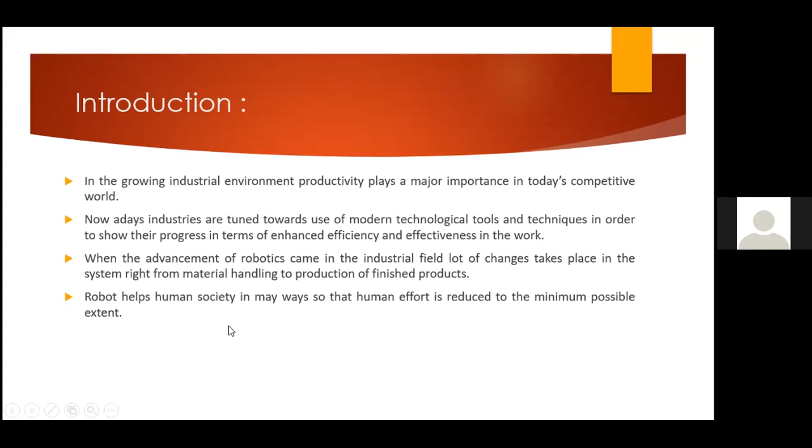So to overcome human accidents in hazardous, unstructured work environments, robots help human society by reducing the manual fatigue experienced by workers due to continuous monotonous jobs done by human operators. Automation brings safety to the existing work environment and keeps people more secure within it.

Today we are going to discuss some practical constraints in robot kinematics motion with the help of a small work cell unit, using the simulation package namely RoboDK solver. It is a process simulator, a three-dimensional process simulator. In that, we are going to discuss different hand motions with reference to a Cartesian coordinate system.

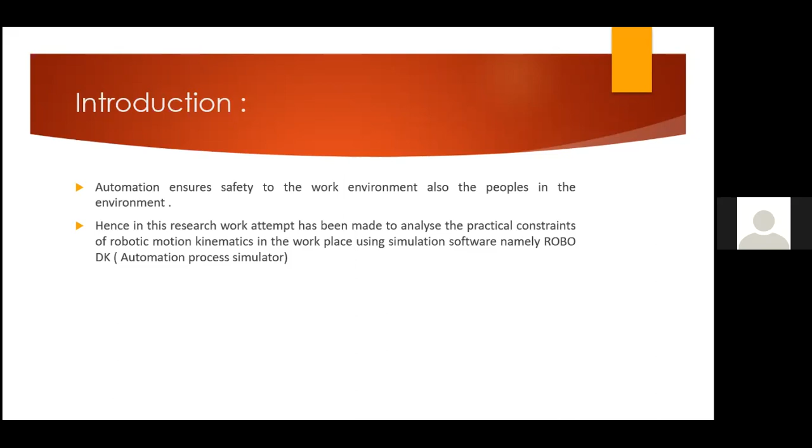And these are some of the literature survey, in which different authors have contributed their ideology towards robot simulation in different applications. Let us take the first paper, literature article number 1.

In this paper, the author has identified the use of robo simulators in areas like teaching, education, learning, and research, and also in training employees, that is software users. The use of simulators has become a good complementary tool to students.

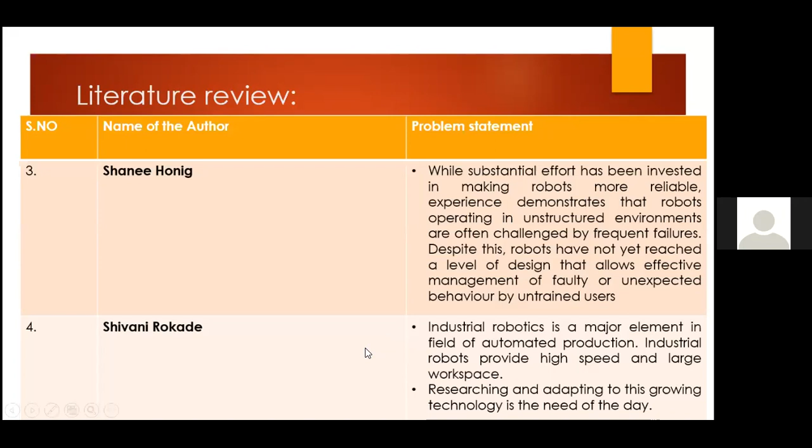And the last one, the fourth article. The author has focused on the advancement of industrial robotics, considered the need of the hour, which has to be implemented in research by doing a lot of survey-based work, understanding the social concerns of various industries, so that we can fulfill supply and demand, and what the customers exactly perceive based on the product delivered by different manufacturing industries.

So from the literature survey, it is observed that based on a couple of papers, researchers have contributed general ideas by using simulation in the area of education, conducting job interviews, and factory line assembly works. But only a few works, at a minute micro level, have focused on kinematic motion analysis.

So why the reason for focusing on kinematic motion analysis? Before going to mount any robotic assembly setup inside the work cell layout, we need to ensure the affordability as well as the flexibility of the robot, such that it can freely move its joint arm linkages without colliding or hitting nearby objects.

So the work can be completed with very high accuracy, and the quality of finish in job completion can be expected at zero defect at a very high rate. For that purpose, the collision mapping planner, which involves the various kinematic motion of a robot link, that we are going to discuss in the future consecutive slides.

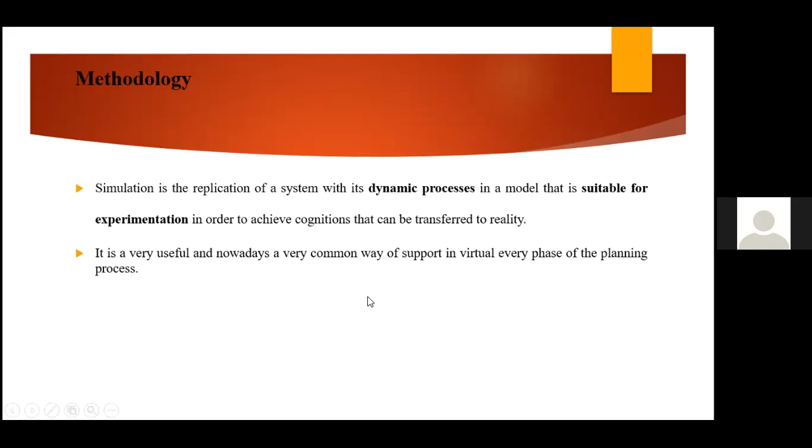In my project work, the simulation studies were carried out using the software called RoboDK, which primarily tries to analyze the kinematic motion of a robotic arm. RoboDK version 5 is an open source, freely downloadable software with a 1 month trial version. After 1 month, we can reinitialize it again.

Now using this RoboDK solver, let us understand the basic concept of robot kinematics and the difference between inverse kinematics and forward kinematics. These are the two different subclasses available in robot kinematics.

Robot kinematics describes the physical movement or motion of a body without considering the force and the moments. It is an analytical study of motion in the manipulator, formulating a suitable kinematic model by constructing a 3-dimensional rigid body, so that we can understand the critical behavior of various industrial robot manipulator systems. This is the problem objective, which we will later solve with the help of the demo software.

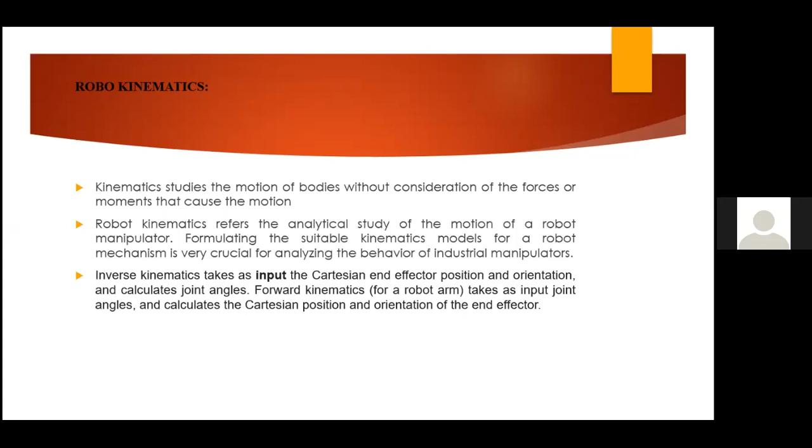Here we are going to discuss how to find out collision checking with the RoboDK solver, and the possible ways to prevent collision by obstacle avoidance within your real setup, through 3D virtual simulation method.

This section is going to cover the following topics in the next consecutive slides: how to activate the simulation checking programs for the simulator, and how to define the map, that is the trajectory path planning of an arm robot, by activating the collision detection map.

Now I can show you some of the demo models by changing the screen. Later on I will discuss the results. Now I will move on to the software workbench.

Here you are viewing the default work area of the RoboDK solver. This is nothing but the new workstation. By clicking new workstation, the axis coordinate system gets enabled.

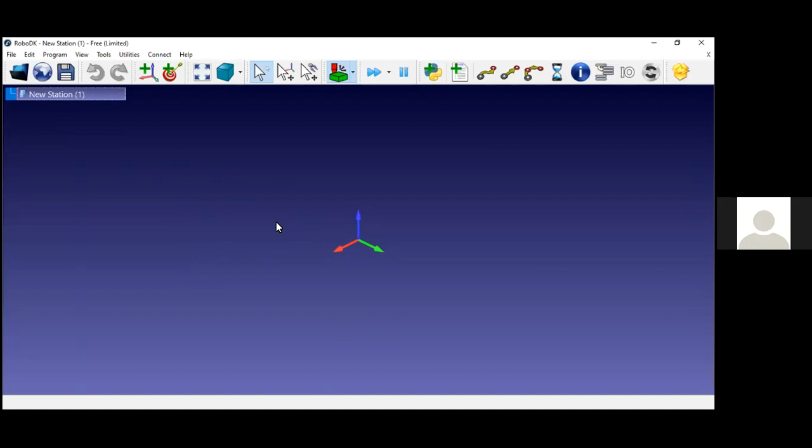Now I want to install a 3D simulator by clicking File, Open Menu. Here there are different varieties of industrial robots available. I'm just randomly picking one of the 3D models, this process simulator of a manipulator.

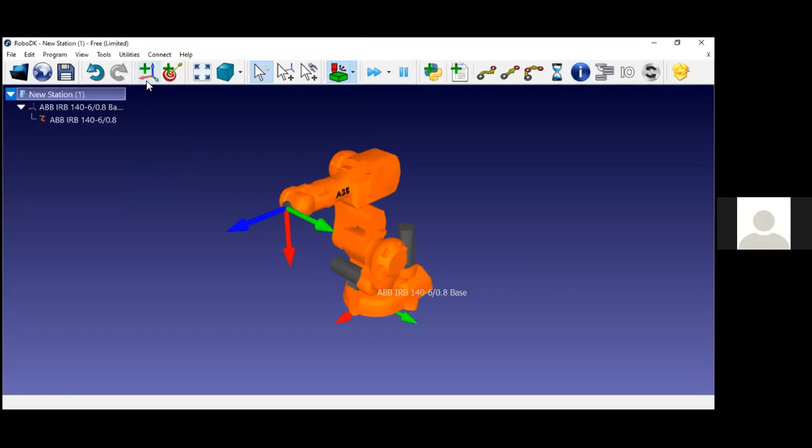Now I'm going to do the collision mapping planner on this robotic arm manipulator, by choosing the option Utilities, moving to the collision free motion planner. By clicking that option and creating a collision free map, a small pop-up dialog box will open. Here there are certain boundary conditions, including number of samples.

Let us understand what is meant by number of samples. Here, what is 100? It is nothing but 100 locations, different nodal points. In a given work cell or work area, to cover each and every distance in different locations, I may create 100 or 120 nodal points, such that the arm has to cover the distance between node 1 and node 2. So the number of samples is how many location points you define in the space, within the Cartesian space.

Then there is minimum number of edges per sample, which is 25. So for example, out of 100, it has to randomly cover 25 nodal points.

For example, node 1 to node 2, what is the distance covered between these two points? Based on that, we can position the path planning of the robot arm, and also find out the geometry, the trajectory, the path traced by the arm movement.

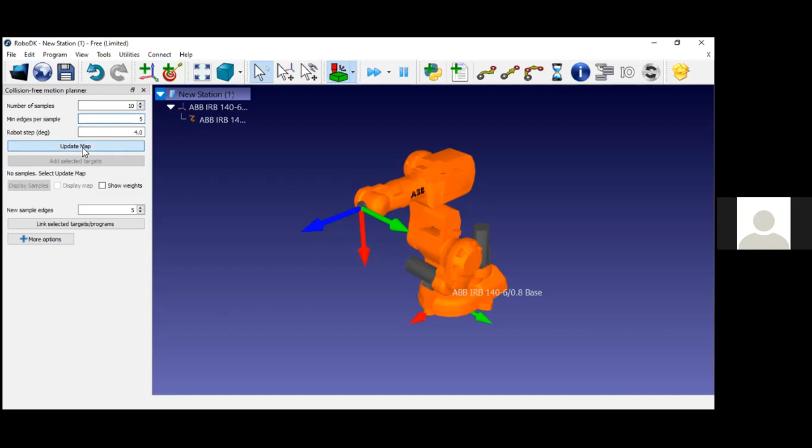Okay, I'm going to run the program. If you want, we can change the number of samples to 10. Let's solve a small, simple exercise with 10 samples and a number of edges per sample. Let's take 5 edges out of 10. Update the map by clicking update map.

So now we have seen a small, simple exercise for this particular problem. You have seen the different arm end effector positioning. Within a fraction of a second, we have attained the solution.

Now let us discuss the larger problem. I'm keeping 150 nodes, so let us measure the time taken, how many minutes it takes to find the outcome of the problem. Okay, so again, repeat the same operation.

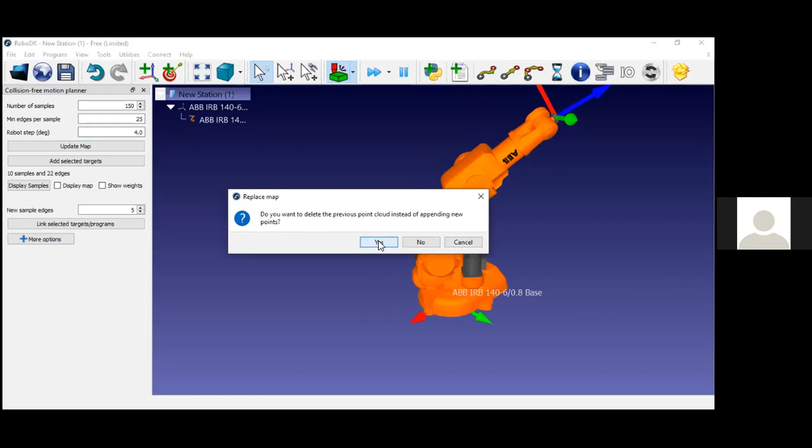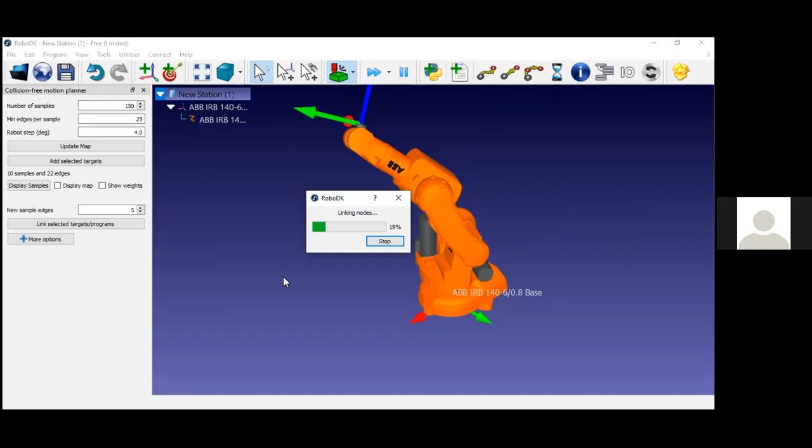Now it is such a lengthy experiment. It tries to link each and every node within the workspace. The number of nodes is given as 150, so it tries to calculate and link all the various independent nodal points that are defined within the workspace unit. Accordingly, the manipulator of the robot arm has to position based on the conditions that have been specified here.

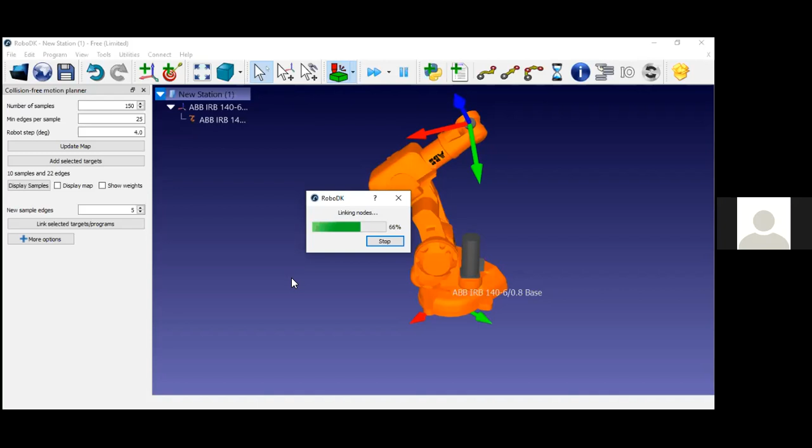By doing this experiment, we can design a very safe layout such that the arm should not go beyond the maximum possible extent and interact with the neighboring object. So we can prevent collision and ensure it's risk-free, reducing the careless accidents that occur inside the factory space. This kind of exercise helps optimize the plant layout, the work cell design of a robot, and what space is occupied for the mission that will exactly cover the area.

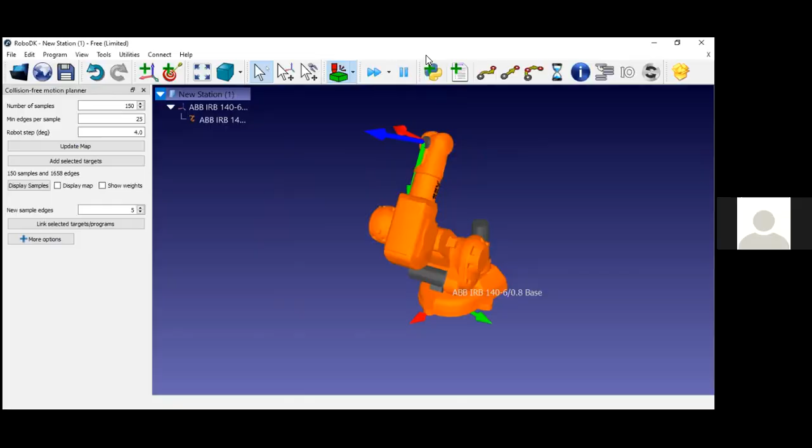So now with this, I will just stop sharing the screen and move to the PPT mode.

So this is the solved results. Using that software, I obtained the following results for various combinations for different motions. From figure 1, the number of iterations is fixed to be 100, and the robot step angle is set to be 3 degrees. Based on that, the total simulation runtime is estimated to be 35 minutes.

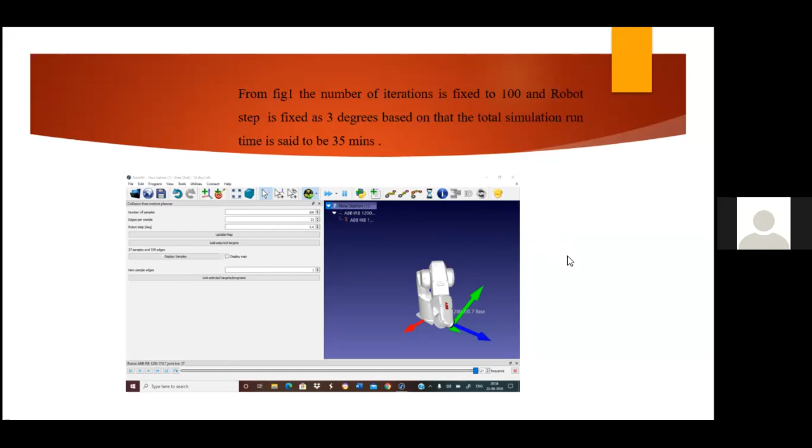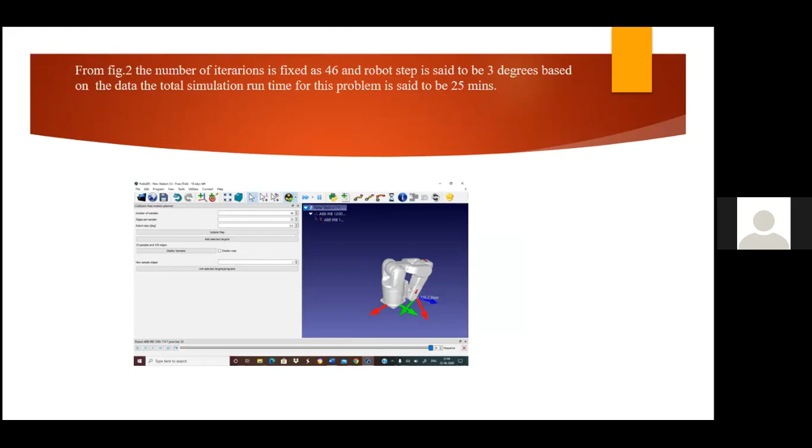In the next combination of motion, the number of sample locations is set to 46, keeping the same degrees of freedom, that is step angle 3. So we can estimate the simulation time of 25 minutes.

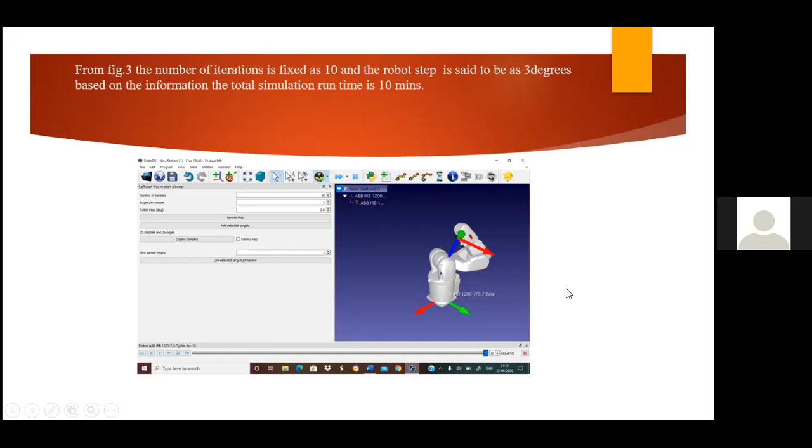Now the third sample figure represents the number of iterations, that is sample location set to 10, and step angle measured at 3 degrees. The total simulation time is measured to be 5 to 10 minutes. Using a stopwatch, I have taken all those simulation times, the process time. But in this software, we cannot calculate the simulation time directly, so I manually calculated the simulation time for every arm movement between the initial starting node and the final node.

Based on this work, the following are some of the results and discussion. From the simulation analysis, it is clearly understood that when the number of iterations for the given problem increases exponentially, it takes a lot of time to predict the solution. At the same time, when the number of iterations decreases gradually, within a less span of time we can analyze the outcome for the problem.

So these are the comparisons that have been carried out in the mini project work, in order to study the collision behavior of a robotic system by imparting the simplified motion path planner using offline programming interface within the workspace facility.

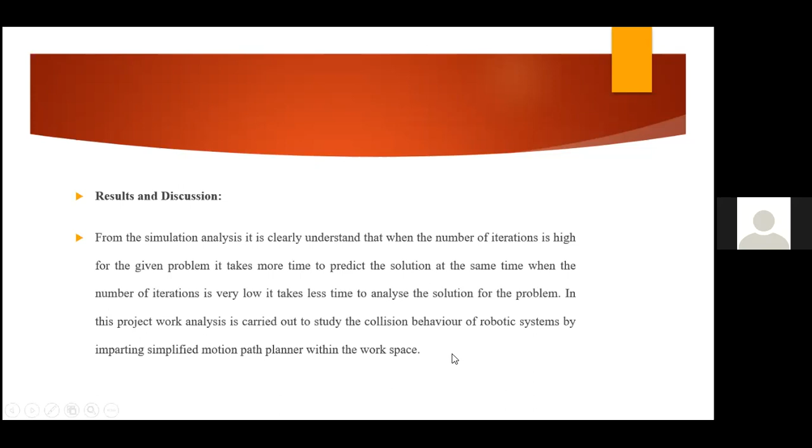These are the conclusions for today's workshop that have been pointed out here. In the given work, detailed analysis is carried out by undergoing different simulation mechanisms, the robo-kinematics, using the software called RoboDK.

And also we have discussed about what is forward kinematics and inverse kinematics in the introduction of the program. Based on the simulation result, it is observed that for any real automation control system, we have to provide a well-defined, comfortable workspace cellular layout.

That can help to carry out the mechanical operation in a more automated way without any collision within the environment. Simulation analysis is carried out for 3 to 4 trials, and based on the simulation results, the software gives the best solution for the minimum number of iterations.

This helps the layout designer to plan accordingly, and also we can model the workspace constraint based on the layout type, to ensure the automation system carries out in a safer way by increasing the efficiency and effectiveness overall.

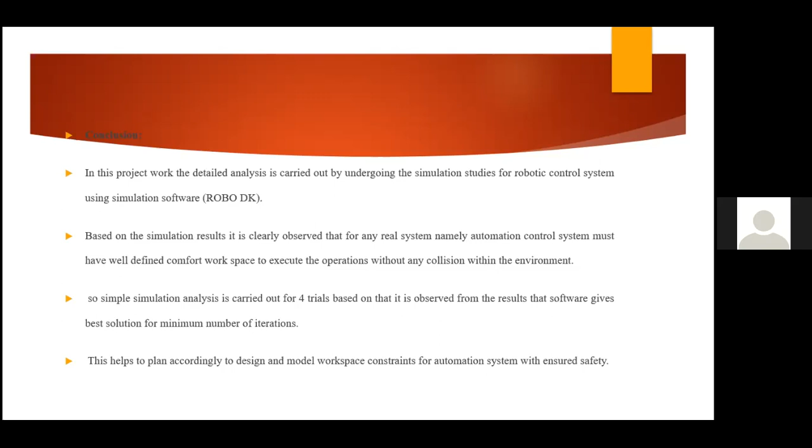This software is available on an open source platform. You can download it and do similar kinds of analysis. This software is mainly for creating facility planning and material handling. For that purpose, the RoboDK solver is the objective of that software, for kinematic motion path planning.